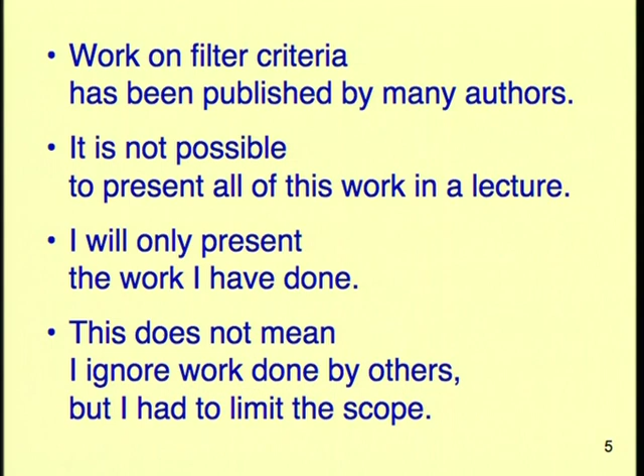Work on filter criteria has been published by many authors, and it is not possible to present all of this work in a lecture. In fact, I will only present work that I have done. This doesn't mean that I ignore work done by others, but I had to limit the scope. The work I've done on filter criteria is essentially theoretical. This does not mean I ignore experimental work. In fact, I do refer to experimental data, but by just doing rational analysis, it was possible to build a coherent system of filter criteria.

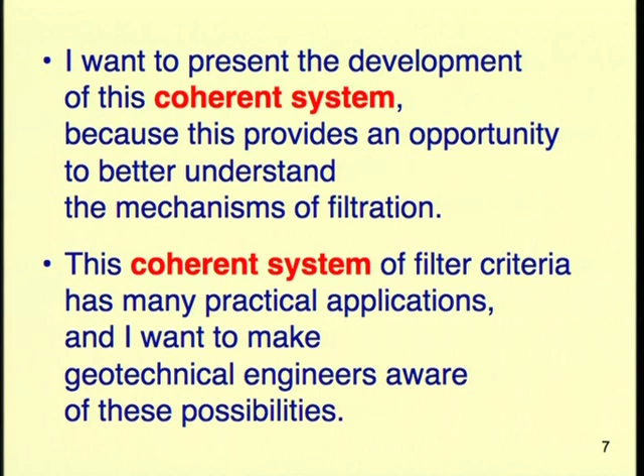And I want to present the development of this coherent system because it provides an opportunity to better understand the mechanisms of filtration. And this coherent system has many practical applications, and I want to make geotechnical engineers aware of these possibilities. I did this work to improve criteria for geotextile filters, but this work is applicable to granular filters. In fact, the first steps of the development of criteria for geotextile filters were inspired by granular filter criteria. As a result, this lecture often refers to Terzaghi's filter criteria.

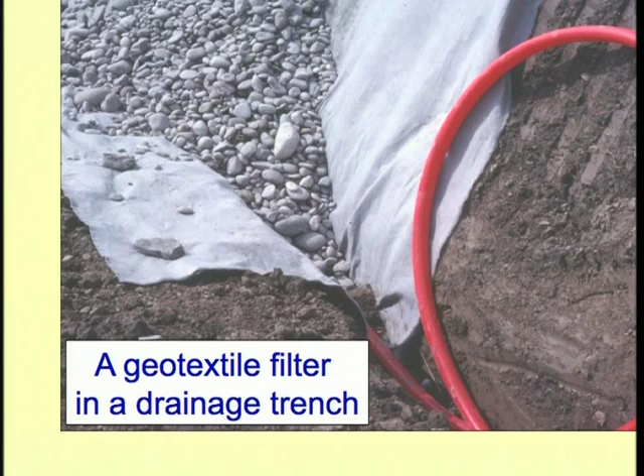Now, Terzaghi's criteria for granular filters are well known. The D15 of the filter should be greater than 4 or 5 times the D15 of the soil. That means the D15 of the filter must not be too small, and this is the permeability criteria. The D15 of the filter must be less than 4 or 5 times the D85 of the soil. That means the D15 of the filter must not be too large, and this is the retention criterion. The difference between the factors 4 or 5 is not significant, and I will use 5 in my discussions.

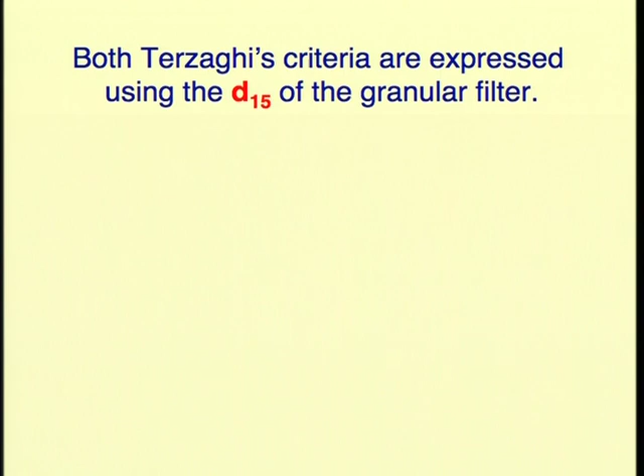Both Terzaghi's criteria are expressed using the D15 of the granular filter. This is possible because the D15 of a granular material is related to the size of its openings. And the relationship is, opening size is 1/5 of the D15 of the filter approximately. And this is based on theoretical and experimental work on arrangements of particles. In the 70s, several criteria for filter fabrics were used, some of them inspired by Terzaghi's criteria.

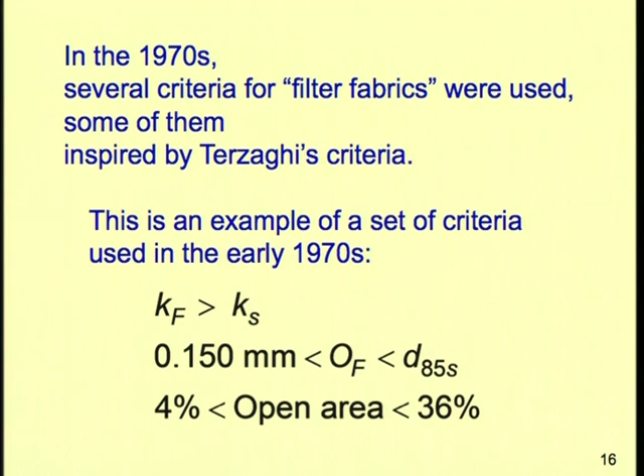Here is an example of criteria used in the 70s. In particular, the opening size of the filter had to be smaller than the D85 of the soil and greater than 0.15 millimeters. Early on, it was even explicitly mentioned that non-woven filter fabrics should not be used.

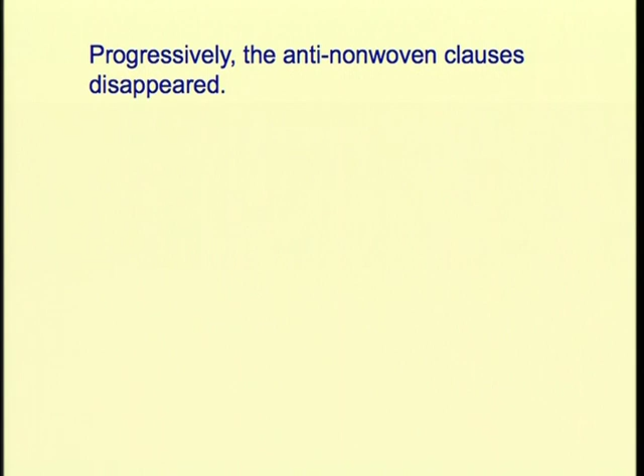In any case, many non-woven fabrics were eliminated by the requirement of opening size greater than 0.15 millimeters, and all were eliminated by the requirement that the open area should be less than 36%. Progressively, the anti-non-woven clauses disappeared. However, the remaining criteria for filter fabrics were not completely satisfactory, as we will discuss. And then in 1977, the terminology geotextile appeared, and it will be used in the rest of this lecture.

In this lecture, I will discuss problems related to the old criteria, present the development of proposed criteria, and discuss the application of the proposed criteria to both geotextile filter and granular filters. First, the development of a permeability criterion for geotextile filters with applications to granular filters.

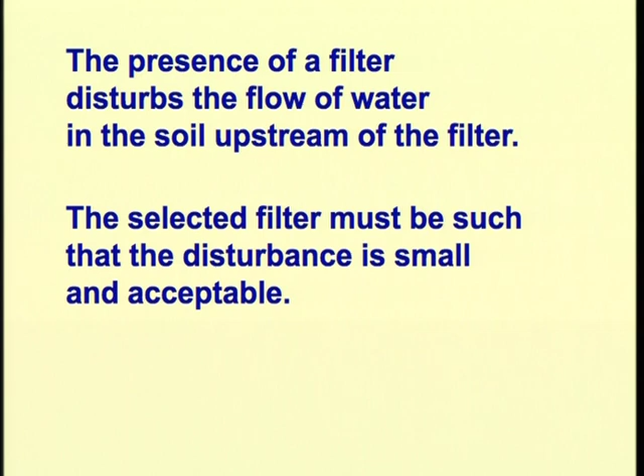The presence of a filter disturbs the flow of water in the soil upstream of the filter. So the selected filter must be such that the disturbance is small and acceptable. The disturbance can affect pore pressure and flow rate. Therefore, the permeability criterion should include two requirements, one for pore pressure and the other for flow rate. So first, the pore pressure requirement.

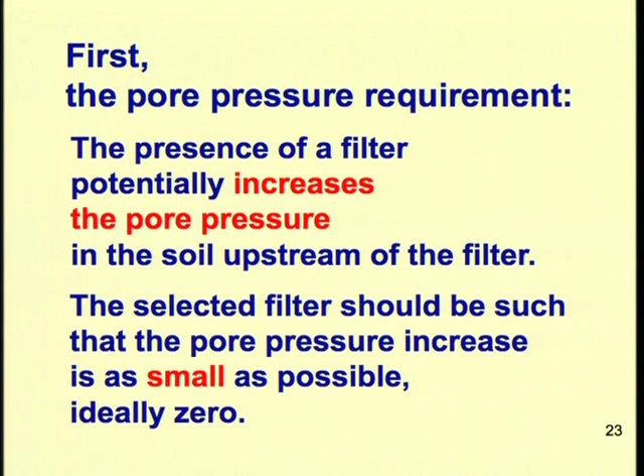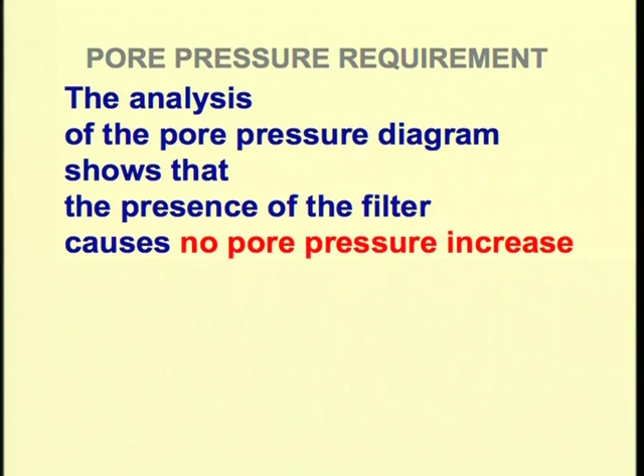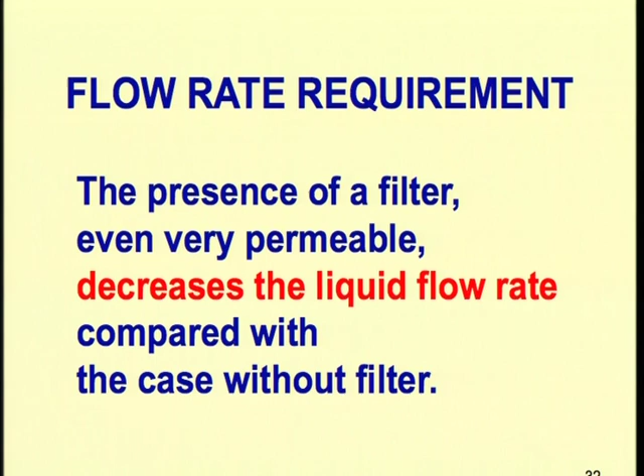The presence of a filter, even very permeable, decreases the flow rate compared to the case without filter. Calculations done with Darcy's equation show that the flow rate decrease is less than 10% of the flow rate without filter if the following requirements are met. Hydraulic conductivity of filter greater than hydraulic conductivity of the soil if the filter is thin, 1 to 10 millimeters, and hydraulic conductivity of the filter greater than 25 times hydraulic conductivity of the soil for a thickness of the order of 250 to 2500 millimeters.

Of course, the thickness applies to geotextile filters. Therefore, the first requirement reads hydraulic conductivity of the filter greater than hydraulic conductivity of the soil for geotextile filters. And the second requirement applies to granular filters, and therefore it reads hydraulic conductivity of the filter should be greater than 25 times the hydraulic conductivity of the soil in the case of granular filters. Let's discuss those two requirements.

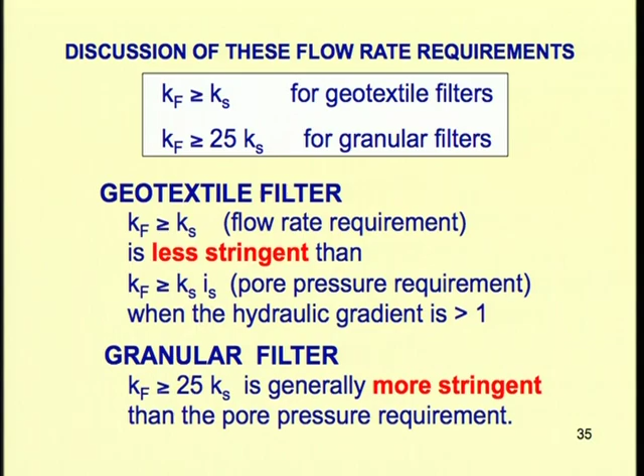In the case of geotextile filters, the flow rate requirement is less stringent than the pore pressure requirement when the hydraulic gradient is greater than 1, and the opposite, of course, when the hydraulic gradient is less than 1. With granular filters, 25 times the hydraulic conductivity of the soil is virtually always more stringent than the pore pressure requirement because the gradient is virtually always less than 25.

Now, it's important to note that this flow rate requirement for granular filters can be expressed in terms of particle size. Indeed, it is well known that the permeability of a granular material is proportional to the square of a small particle size, D10, D15, for example. This is the well-known Kozeny-Carman equation, of which Hazen's equation is a special case. Therefore, the flow rate requirement for a granular filter is equivalent to D15 of the filter greater than 5 times the D15 of the soil. Of course, this is the classical permeability criterion for granular filters.

So this discussion shows that the classical permeability criterion for granular filters is only the flow rate requirement and not the pore pressure requirement. But generally, it is more stringent, so it is not a problem.

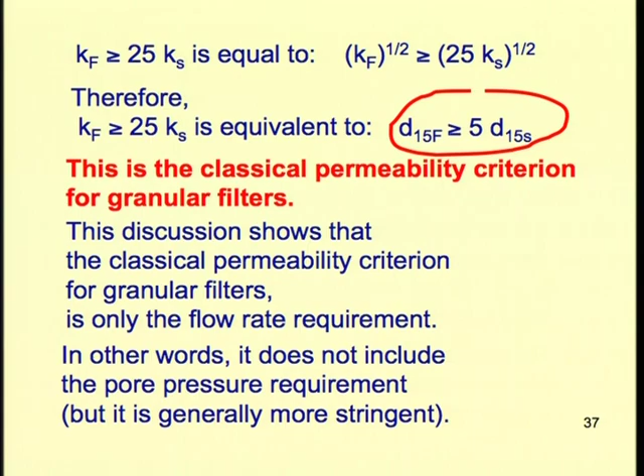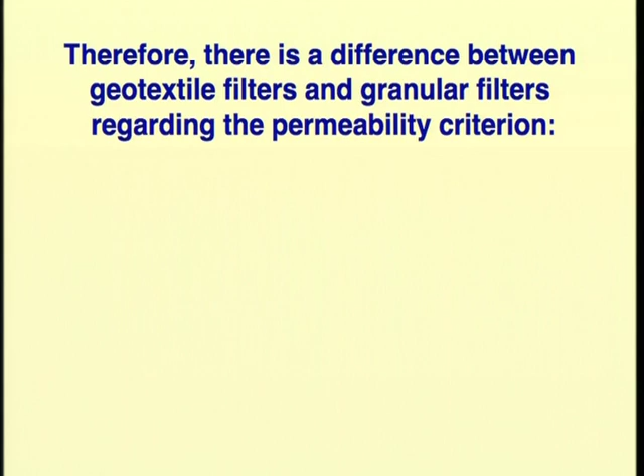So in conclusion, the permeability criterion for geotextile filters is either Ks multiplied by the gradient or Ks, depending on the gradient, whichever is greater. But for granular filters, it is generally 25 times the hydraulic conductivity of the soil, which is the traditional permeability criterion. So therefore, there is a difference between granular filters and geotextile filters regarding the permeability criterion.

In the case of geotextile filters, either the pore pressure requirement or the flow rate requirement governs, whereas in the case of granular filters, it is virtually always the flow rate requirement that governs. So clearly, to develop an appropriate permeability criterion for geotextile filters, it would have been incorrect to simply imitate Terzaghi's permeability criterion for granular filters, because we would have seen only one of the two requirements.

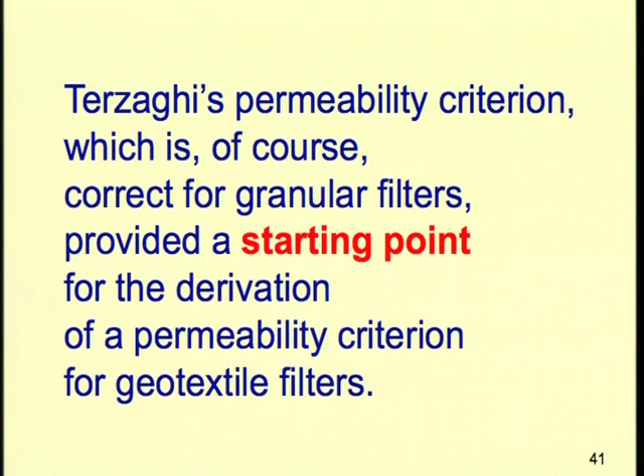So Terzaghi's permeability criterion, which is of course correct for granular filters, provided a starting point for the derivation of a permeability criterion for geotextile filters. However, to extend the work of Terzaghi on granular filters to geotextile filters, it was necessary to thoroughly understand the requirements related to water flow through a filter.

Let us discuss now the development of retention criterion for geotextile filters with applications to granular filters. The question is, how should we select the maximum allowable opening size of a geotextile filter to retain a soil? A simple answer would consist in adapting to geotextiles Terzaghi's retention criterion for granular filters, which is D15 of the filter less than 5 times D85 of the soil.

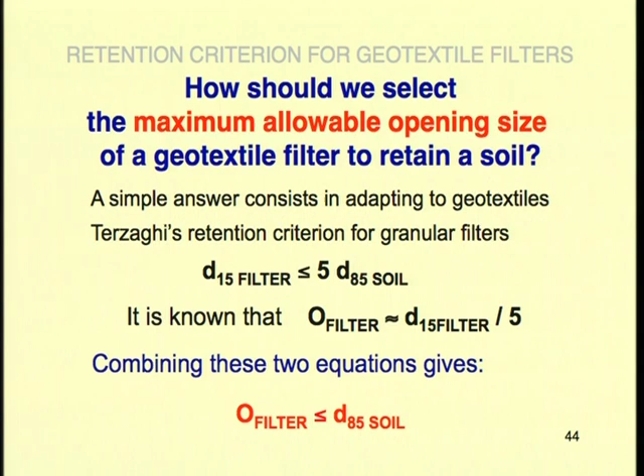We know that the opening size of a filter is about 1/5 of the D15 of that filter. Combining the two equations gives opening size of the filter less than D85 of the soil. This equation means that a filter should only retain the large soil particles. Retaining large soil particles works if the large particles retain smaller particles. In other words, if the soil is internally stable. Therefore, an ideal retention criterion should take into account not only the opening size of the filter, but also the internal stability of the soil.

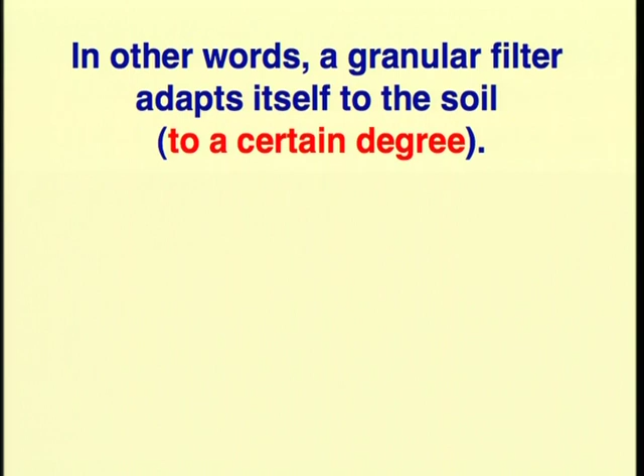However, to a certain degree, granular filters may work even if the soil is not internally stable because they are thick. And the mechanism is the following. Particles that are not retained may accumulate in the filter, thereby decreasing the filter opening size until the filter works. In other words, a granular filter adapts itself to the soil to a certain degree. As a result, a granular filter can be designed to a certain degree using a retention criterion, such as Terzaghi's retention criterion, that does not take into account the internal stability of the soil.

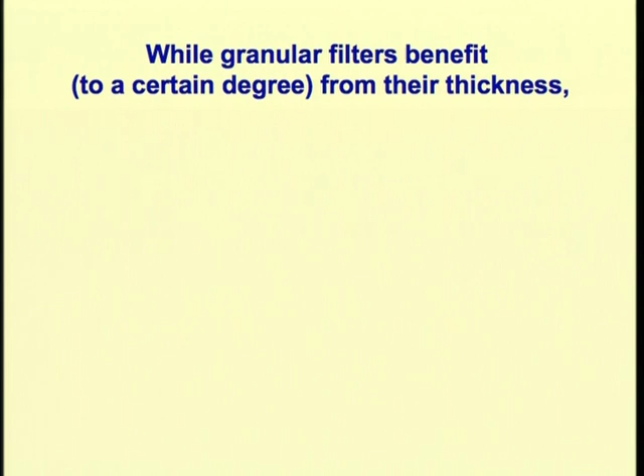Essentially, granular filters, because they are thick, can be designed using a simple retention criterion, such as Terzaghi's retention criterion. However, this is true only to a certain degree, which limits the applicability of Terzaghi's retention criterion to soils having a maximum particle size of 4.75 millimeter, hence the practice of the truncation of the particle size distribution curve, which we will discuss later. Now, while granular filters benefit to a certain degree from their thickness, geotextile filters are thin, which has created an incentive for developing more accurate retention criterion. A criterion that takes into account the internal stability of the soil.

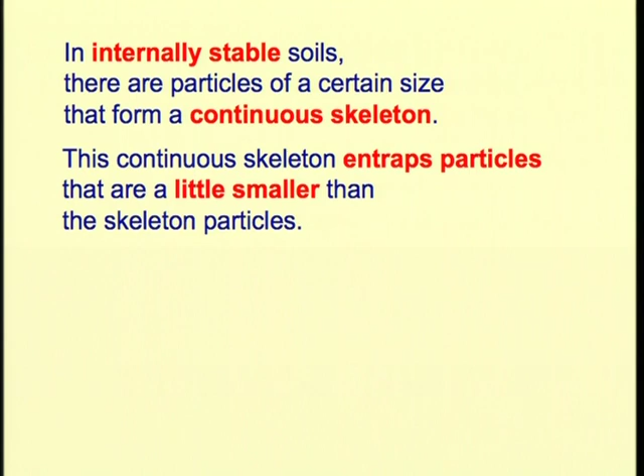In internally stable soils, there are particles of a certain size that form a continuous skeleton. This continuous skeleton entraps particles that are a little smaller than the skeleton particles. In turn, these particles entrap particles that are a little smaller, and so on. So this is an internally stable soil. So therefore, if a filter has openings such that the skeleton is retained, then all particles smaller than the skeleton are retained in the case of an internally stable soil. And of course, particles larger than the skeleton particles will be retained, because if a filter retains certain particles, of course, coarser particles will be retained.

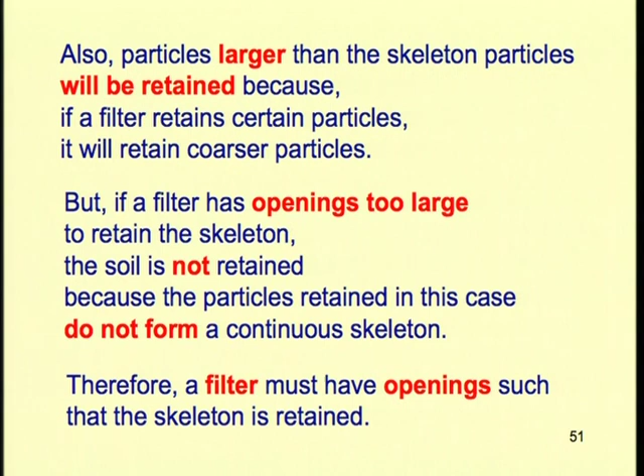But if a filter has openings too large to retain the skeleton, the soil is not retained because the particles that are retained in this case do not form a continuous skeleton. So therefore, a filter must have openings such that the skeleton is retained. So that leads to two questions. What is the size of the skeleton particles? And what filter opening size is required to retain a given skeleton? So let's address the first question.

As mentioned earlier, the skeleton is an essential consideration for the retention of an internally stable soil. Internal stability depends on particle size distribution, which is characterized by the coefficient of uniformity. So geometric considerations show that in a soil with a coefficient of uniformity of approximately 3, particles are tightly interlocked.

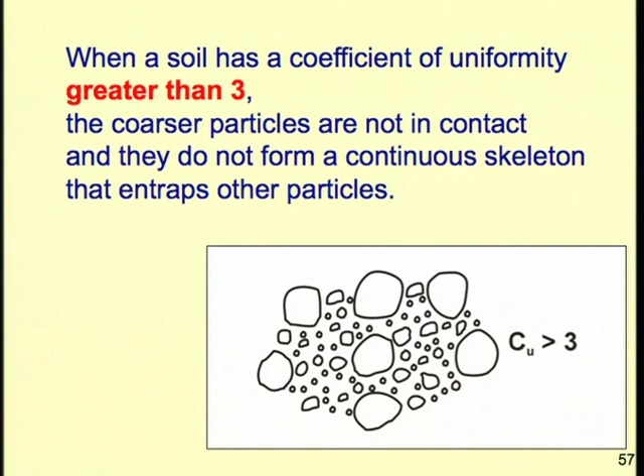In other words, such a soil has maximum internal stability. This is illustrated in the following slides. When a soil has a coefficient of uniformity equal to or less than 3, the coarser particles form a continuous skeleton that entraps all other particles. But if a soil has a coefficient of uniformity greater than 3, the coarser particles are not in contact, and they do not form a continuous skeleton that entraps other particles.

In other words, when a soil has a coefficient of uniformity greater than 3, the coarser particles float in the matrix formed by the other particles, and as a result, they do not contribute to internal stability. So, in the case of a soil having a coefficient of uniformity greater than 3, to develop a retention criterion that takes into account internal stability, we will only consider the fraction of the soil that has a coefficient of uniformity equal to 3. In other words, we ignore the coarse fraction in the development of the retention criterion.

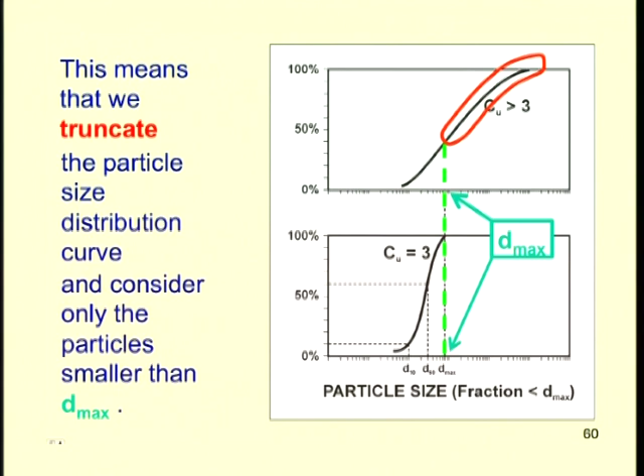This means that we truncate the particle size distribution curve and consider only the particles smaller than Dmax, shown here, such that the remainder of the curve has a coefficient of uniformity of 3. Now, the user of the proposed retention criterion does not have to do this truncation. The truncation is done automatically. It is included in the equations that express the retention criterion. So only this fraction of the curve with a coefficient of uniformity of 3 is used in the proposed retention criterion. So we answered the first of the two questions, the size of the skeleton particles.

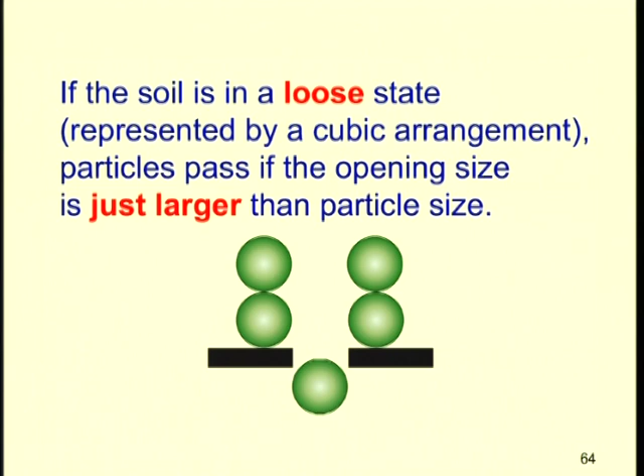Now, what filter opening size do we need to retain a given skeleton? If a soil is in a loose state, represented by a cubic arrangement, particles pass if the opening size is just larger than the particle size. But if the soil is in a dense state, represented by a hexagonal arrangement, particles do not pass if the opening size is just larger than the particle size, because there is the formation of a stable bridge. So if the soil is in a dense state, particles pass only if the opening size is twice as large as particle size.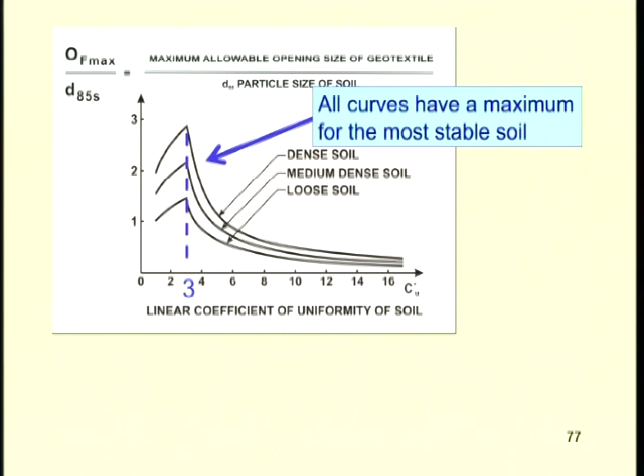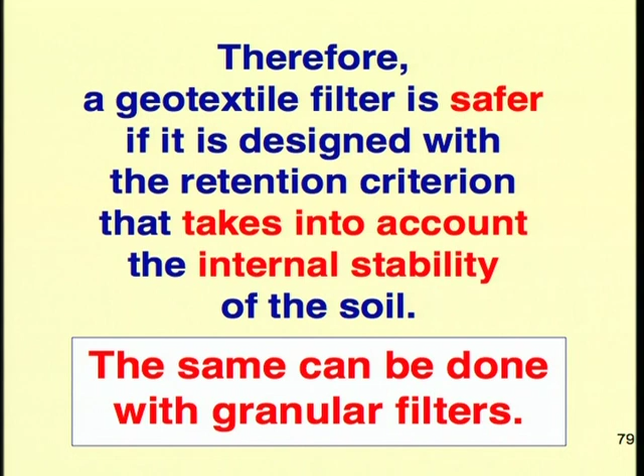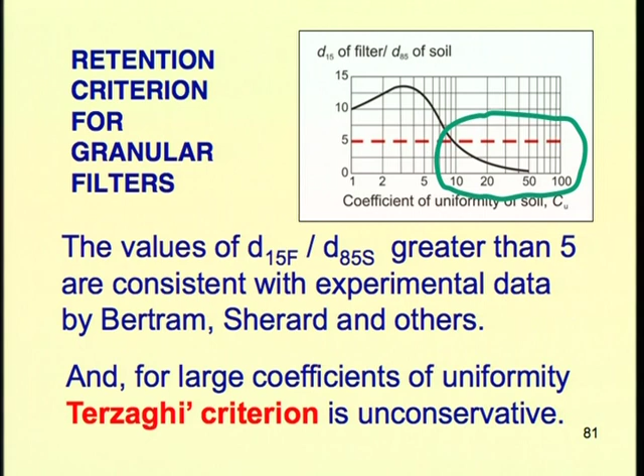But we can do the same for granular filters. The retention criterion developed, as we have seen for geotextile filters, can be extended to granular filter. And here, the vertical axis, instead of being opening size, is D15 divided by D85 of the soil, just to be consistent with the traditional practice for granular filters. And we see here values greater than 5 for the ratio D15 of the filter divided by D85 of the soil, but this is consistent with experiments by Bertram, Sherard, and others. And again, for large coefficient of uniformity, we can see that Terzaghi's criterion is not conservative.

An important consideration is that this retention criterion is applicable regardless of maximum particle size. In other words, it is not limited to particles smaller than 4.75 millimeter. Therefore, the need for the tedious operation of truncating particle size distribution curves at 4.75 millimeters is eliminated.

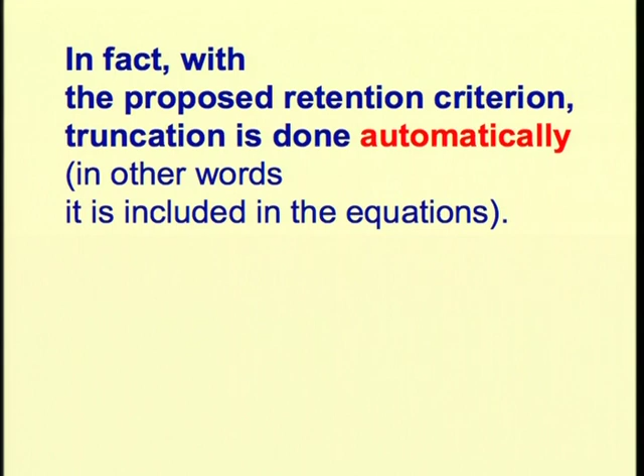In fact, with the proposed retention criterion, there is truncation, but it is done automatically. In other words, it is included in the equations, but more importantly, the automatic truncation takes place at the appropriate location, which is generally not 4.75 millimeters. So therefore, by extending to granular filters the retention criterion developed for geotextile filters, we have obtained a tool for designing granular filters that is simpler and safer than the traditional criterion for soils having a large coefficient

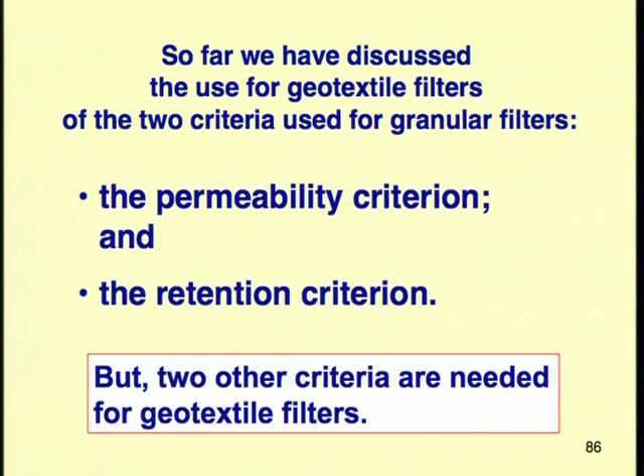of uniformity. So far, we have discussed the use for geotextile filters of the two criteria used for granular filters, the permeability criterion and the retention criterion. But two other criteria are needed for geotextile filters. Indeed, since there is an almost unlimited possibility of making new materials in geosynthetics manufacturing, it is possible to imagine extreme geosynthetic materials that would be unlikely to perform properly as filters, such as geosynthetics with very few openings or some extremely thin geosynthetics. So we need criteria to prevent the use of such materials as filters.

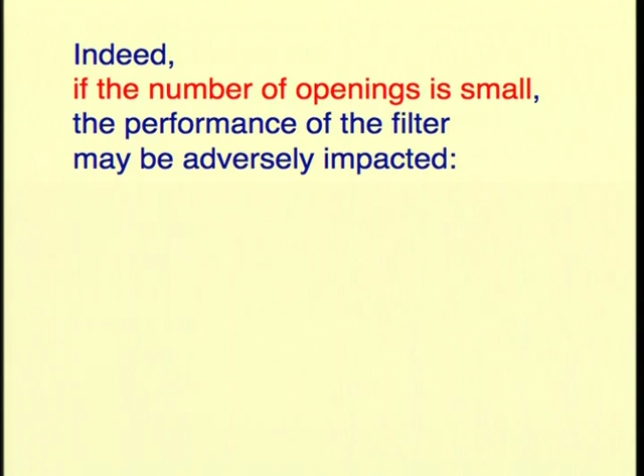So we need, therefore, two additional criteria. One, to ensure that the number of openings is sufficient, and a criterion to ensure that filter thickness is sufficient. First, let's discuss the criterion for the number of openings. In addition to having adequate opening size, a filter should have as many openings as possible per unit area. Indeed, if the number of openings is small, the performance of the filter may be adversely impacted. Liquid flow is concentrated in a small number of channels, which increases the risk of erosion, increases particle transport, thereby increasing the risk of clogging.

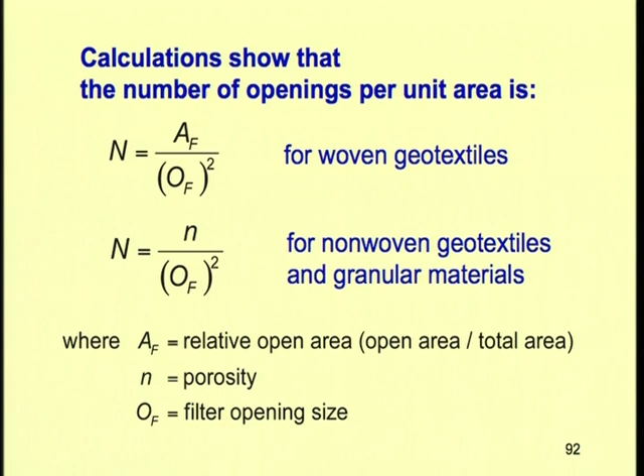And if the number of openings is small, clogging only a few of the openings may significantly reduce flow capacity. So it should be noted that geotextiles are so permeable that even if a geotextile has a small number of openings per unit area, it may still meet the permeability criterion. So clearly, the permeability criterion is not sufficient to eliminate geotextile filters that do not have enough openings. Therefore, a criterion specific to the number of openings per unit area is needed. Calculations show that the number of openings per unit area is given by the first equation for woven geotextiles, where AF is the relative open area of the woven geotextile, and the second equation for non-woven geotextiles, where n is the porosity of the non-woven material.

Now, the relative open area of a woven geotextile is in fact the two-dimensional equivalent of porosity. This is obviously true geometrically, but it's confirmed by the fact that open area in the equation for woven geotextiles plays the same role as porosity in the other equation. So therefore, both relative open area for a woven geotextile and porosity for a non-woven geotextile, or even a granular material, can generically be called the porosity of a filter material. So essentially, the two equations become one, and they mean that the number of filter openings is proportional to the porosity of the filter regardless of the type of filter. So in other words, regarding the required number of openings per unit area, all types of filters should be treated in the same way, and the governing parameter is the porosity of the filter material.

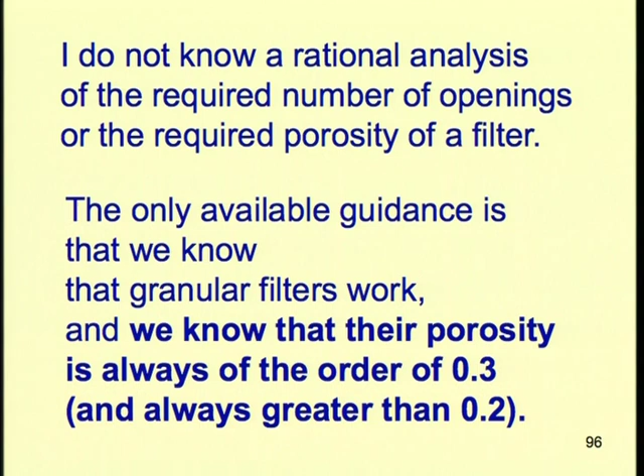Now, I do not know a rational analysis of the required number of openings or the required porosity of a filter. The only available guidance I know is that we know that granular filters work, and we know that their porosity is of the order of 0.3, almost always greater than 0.2. Therefore, it is reasonable to adopt the following porosity criterion for all filters. Porosity should be greater than 0.2, that is 20%. Now, this porosity criterion has never been formulated for granular filters because they all have approximately the same porosity.

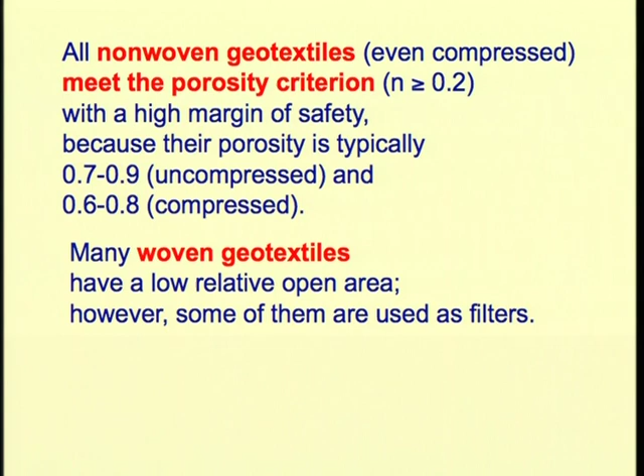But it is essential for geotextile filters because there is a wide range of porosity, from 1% to more than 90% for non-woven geotextiles. All non-woven geotextiles, even compressed, meet easily the porosity criterion. But many woven geotextiles have a low relative open area, which is the equivalent of porosity. However, some of them are still used as filters. But based on the analysis, woven geotextiles with a relative open area less than 20% should not be used as filters. Let's discuss the second of these new criteria needed for geotextile filters, the criterion related to thickness.

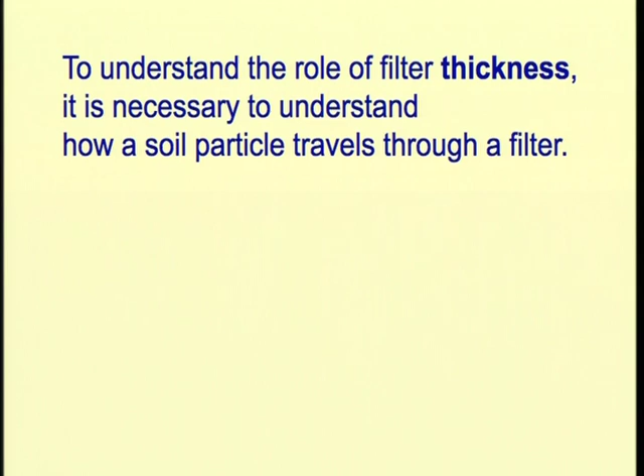And in this discussion, I will not consider woven geotextile filters because thickness is a special consideration in this case. So I will only discuss non-woven geotextile filters and granular filters. To understand the role of filter thickness, it is necessary to understand how a soil particle travels through a filter. A soil particle that travels through a filter, any filter, granular or non-woven geotextile, must go through narrow passages called constrictions.

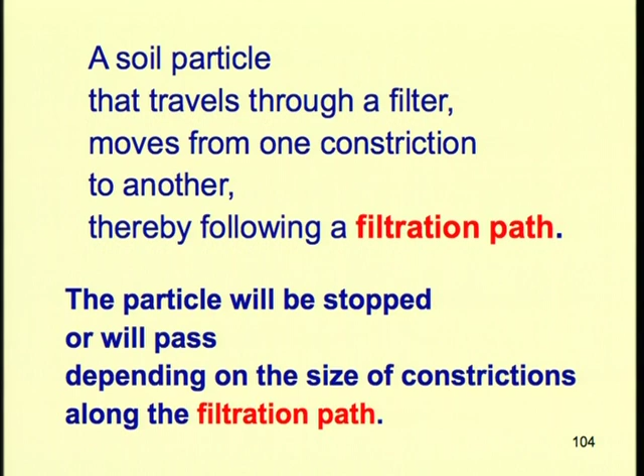In the case of a geotextile filter, a constriction is a passage between fibers. And the size of a constriction is the diameter of the largest spherical particle that passes through the constriction. Now, a soil particle that travels through a filter moves from one constriction to another, thereby following a filtration path. The particle will be stopped or will pass depending on the size of constrictions in that particular filtration path.

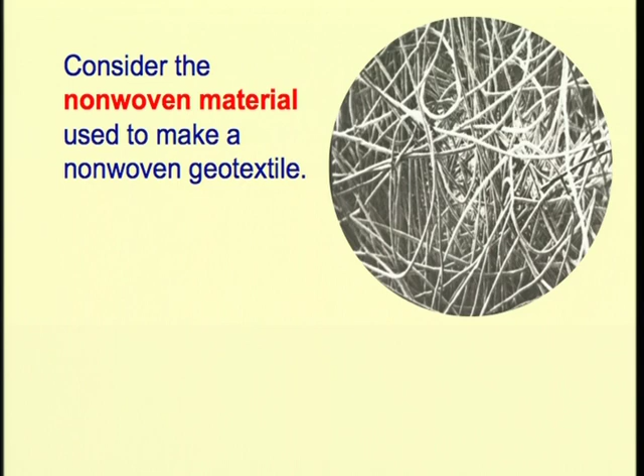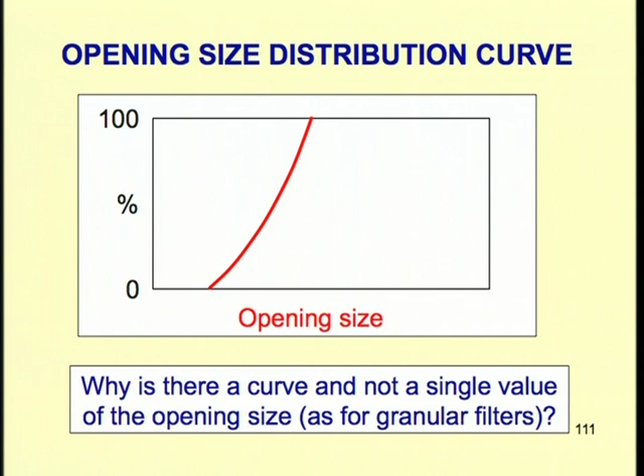A geotextile with a given thickness is characterized by another curve, which is the opening size distribution curve, shown here. So why do we have a curve and not a single value of the opening size as we have in granular filters? Let's discuss that.

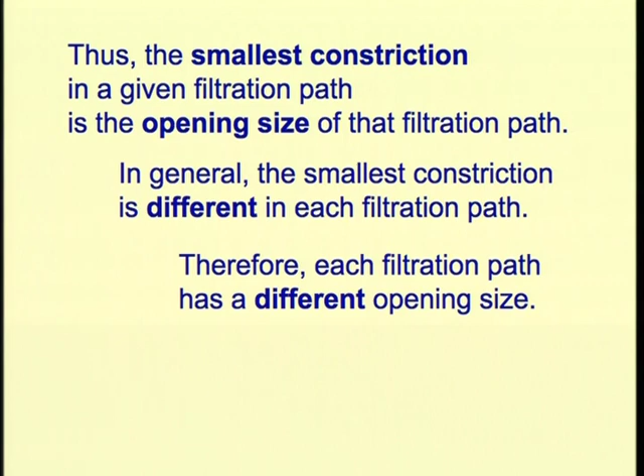Each filtration path contains a number of constrictions. A soil particle can go through the filter if it is smaller than the smallest constriction in the path. So therefore, each filtration path is characterized by the smallest constriction in that path. Thus, the smallest constriction in a given path is the opening size of that filtration path. In general, the smallest constriction is different in different filtration paths. So therefore, each filtration path has a different opening size. So this is why we have an opening size distribution curve, shown here again.

And naturally, the maximum opening size for all filtration paths is the opening size of the filter, which is, of course, at the top of the opening size distribution curve. So now we have two curves. So what is the relationship between these two curves? The opening size distribution curve, which characterizes a filter with a given thickness, and the constriction size distribution curve, which characterizes the material used to make the filter. So we need to make some geometric considerations to establish this relationship.

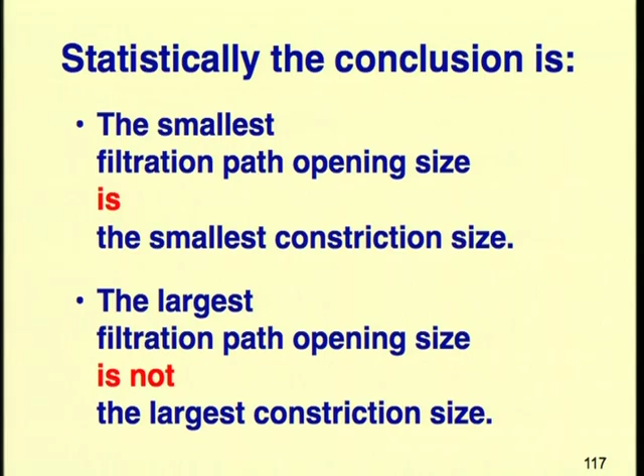In a filter, there is a very large number of filtration paths, millions per square meter. But in a non-woven geotextile filter, due to the limited thickness, there are not many constrictions in each filtration path, typically 10 to 100. So statistically, it's very different, 1 million or 10 to 100. So statistically, the conclusion is the smallest filtration path opening size is the smallest constriction size, but the largest filtration path opening size is not the largest constriction size. Accordingly, the two curves have the same origin, but not the same top.

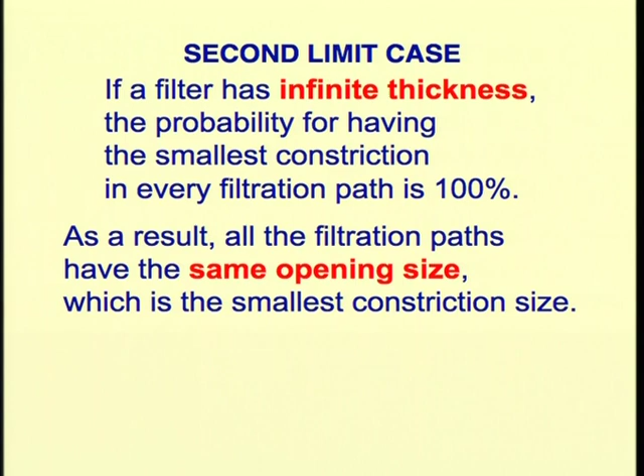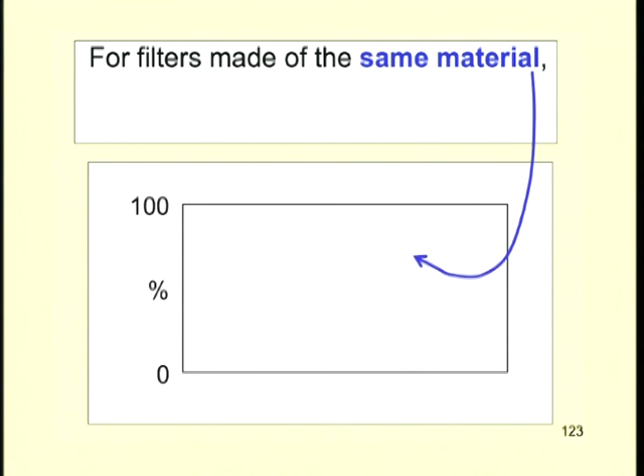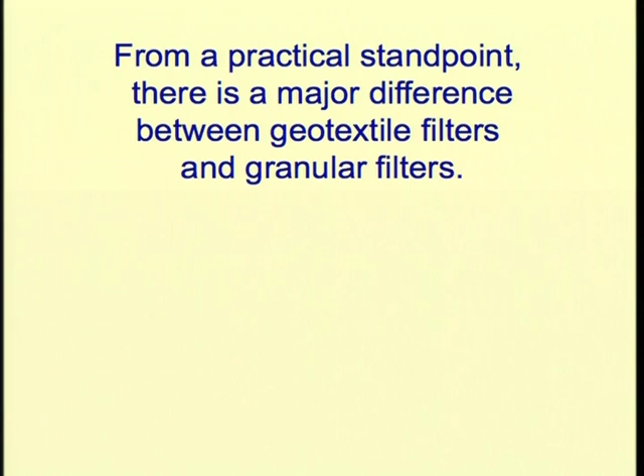And we just saw that, in fact, it decreases for increasing values of the thickness of the filter. This is true for all types of filters. But from a practical standpoint, there is a major difference between geotextile filters and granular filters. Granular filters have a quasi-infinite thickness. So therefore, they have a unique opening size, as we just demonstrated.

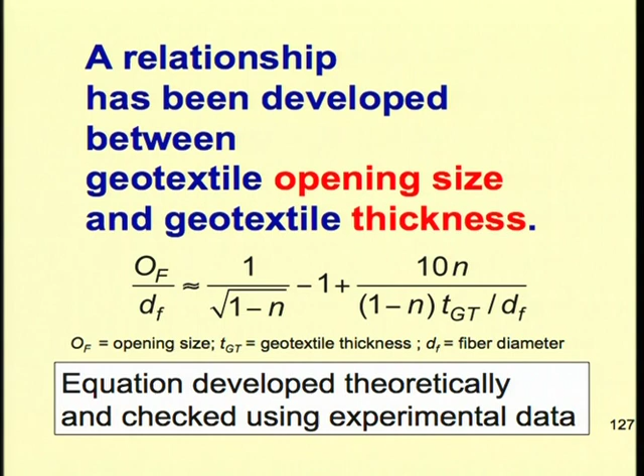Now, so far in this lecture, the impact of geotextile thickness on opening size has been discussed qualitatively. But I have done a mathematical analysis and obtained a relationship between geotextile opening size and geotextile thickness. This is the equation, and the parameters are the fiber diameter and the porosity of the geotextile. This relationship is represented by a family of curves, for non-woven geotextiles, as I said before.

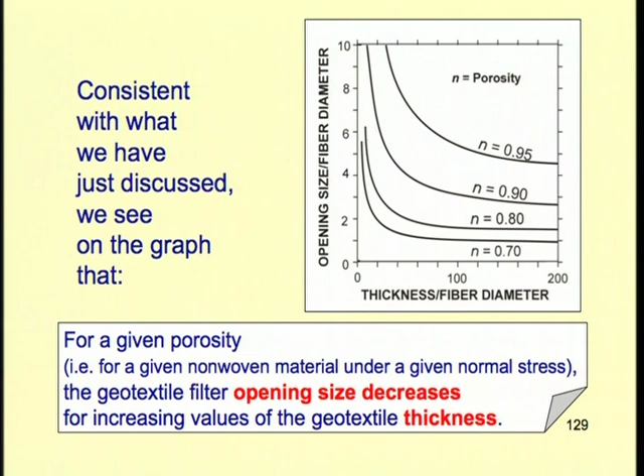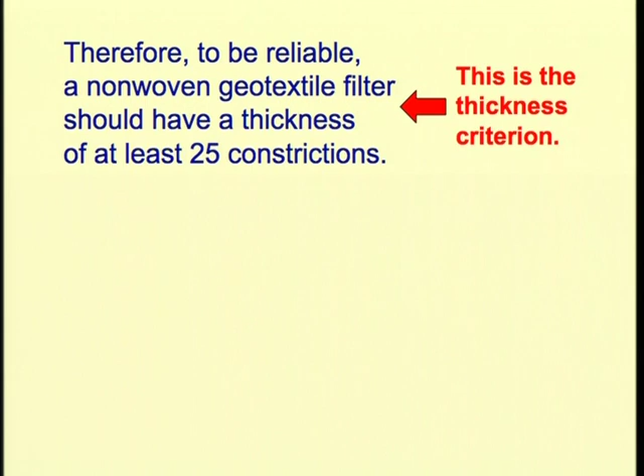Now, it's convenient to express thickness in terms of number of constrictions, so the criterion is independent of porosity, fiber diameter, etc. This work, by the way, is the basis for an ASTM standard on filtration. In summary, four filter criteria have been established for geotextile filters: permeability, retention, porosity, and thickness.

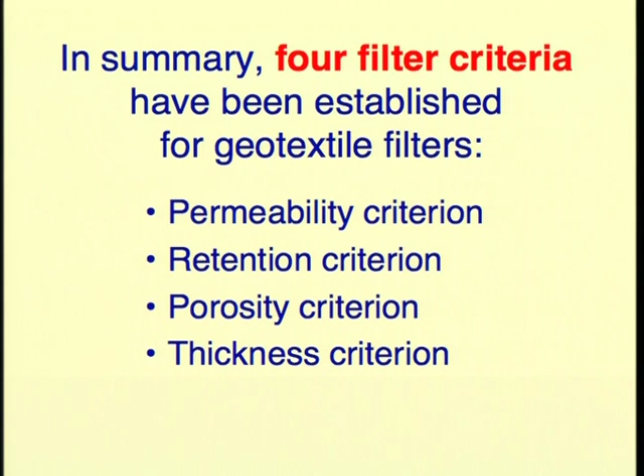But there is a last question. Is this complete? Well, filtration is governed by filter openings. The characteristics of filter openings are the size, the shape, the density, which is the number per unit area, and the distribution. The four criteria address three of those characteristics, as we have seen: the size, the density, and the distribution. But we did not address the shape in those four criteria.

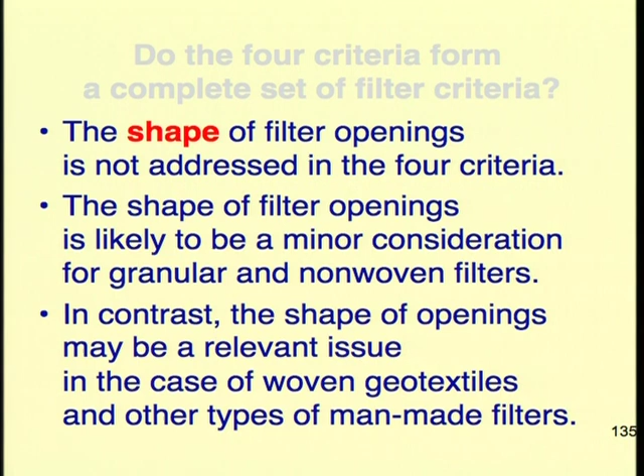The shape of filter openings is likely to be a minor consideration for granular and non-woven filters due to the random structure. But in contrast, the shape of openings may be a relevant issue in the case of woven geotextiles or other types of man-made filters. So clearly more work is needed on the impact of shape of filter openings on the performance of filters.

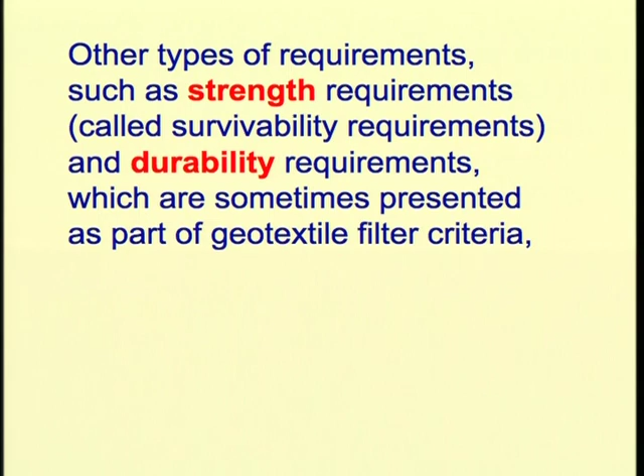But in the meantime, we can consider that the set of four criteria is complete, at least for granular and non-woven filters. Furthermore, this set of four criteria is a coherent set because it addresses only parameters that are relevant to the filtration function. Other types of requirements for geotextile filters, such as strength requirements and durability requirements, are sometimes presented as part of geotextile filter criteria. These are not filter criteria because they are not intrinsic to the filtration function. They can be used for geotextiles performing any other function.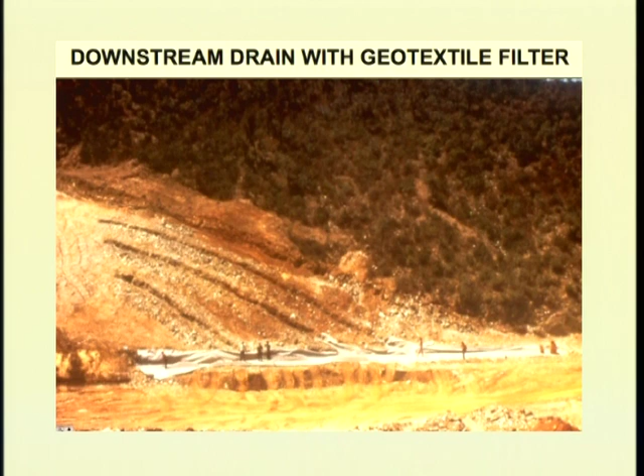This is a photo taken during construction of the downstream portion. You see here where approximately will be the embankment of the dam. We see here a downstream drain with geotextile filter and gravel in the trench, and being constructed finger drains on the side connected to the downstream drain, also equipped with geotextile filter. It is a 17-meter high homogeneous dam constructed with silty sand.

I was the design engineer for the dam, and I could not get adequate sand filter at the last minute. I had to make a quick decision. I elected to use a non-woven geotextile, never used before as a filter. That was in 1970. The dam has been constructed and has been in service ever since 1970.

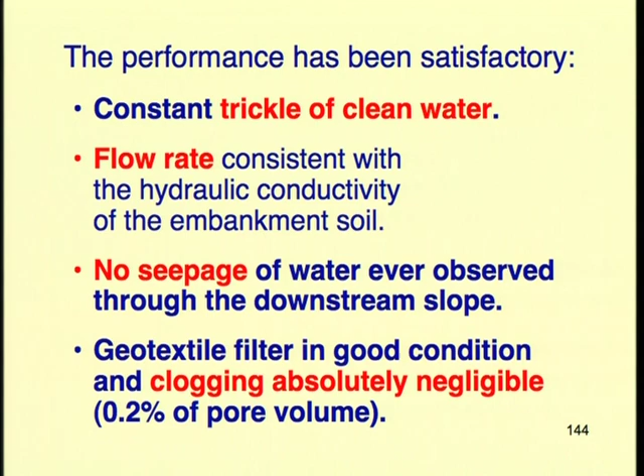The performance has been satisfactory: a constant trickle of clean water, flow rate measured at the outlet consistent with the hydraulic conductivity of the embankment soil, no seepage of water ever observed through the downstream slope, and the geotextile filter in good condition, in particular with negligible clogging, 0.2% of the pore volume, as demonstrated by tests on samples of geotextiles removed from the actual filter 6 years and 22 years after construction.

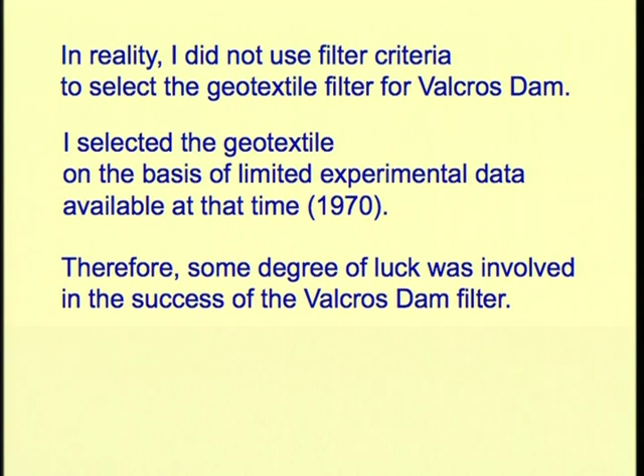So the outstanding performance of the geotextile filter can be explained today. The first comment I will make is that fortunately the filter was not designed using classical filter criteria. In reality, I have to confess that I did not use filter criteria to select the geotextile filter. I selected the geotextile on the basis of limited experimental data available at that time. Therefore, some degree of luck was involved in the success of this filter, and this is why I'm here today.

Ten years later, in the 80s, I felt compelled to repay for that luck and started working on filter criteria. So today, we can finally use the filter criteria for this dam. We have no time, so I just say that it is easy to check that the permeability, porosity, and thickness criteria were met, and we will only discuss the most important, the retention criteria.

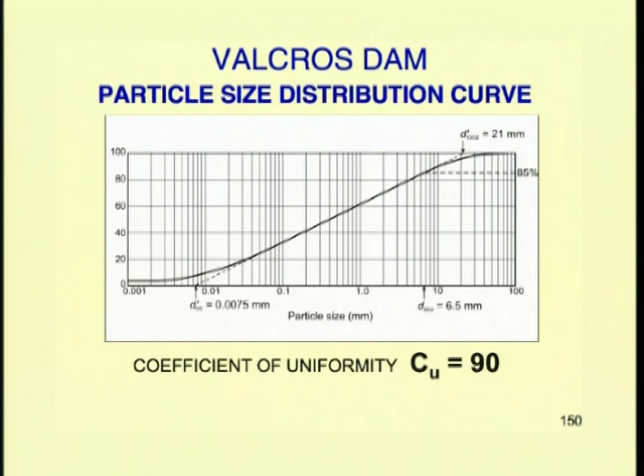This is the particle size distribution curve of the soil used in the dam. Coefficient of uniformity, 90. Linear coefficient of uniformity, 53. Using Terzaghi's retention criterion on the full curve, we obtain 6.4 millimeter. This is very large. We would not use that to retain a silty sand. Well, of course, the problem is caused by the large coefficient of uniformity. So we do what all geotechnical engineers do, truncate the curve.

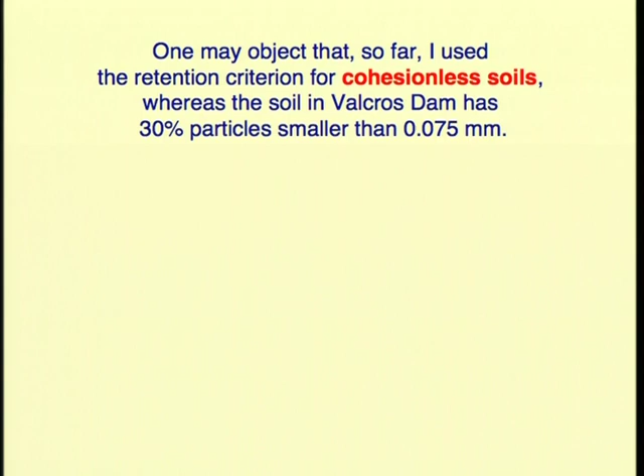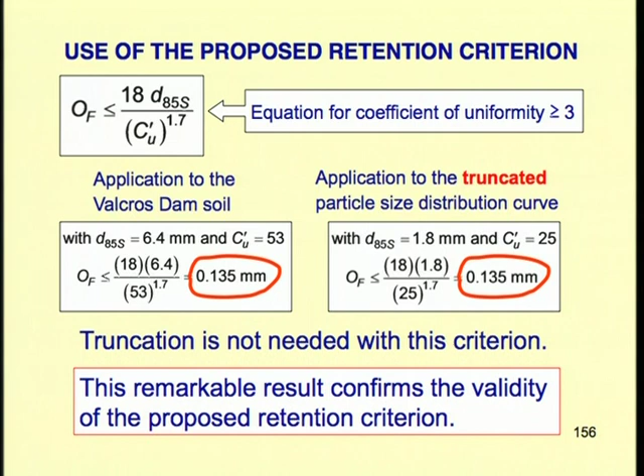So let's try to use the proposed retention criterion. This is the relevant equation for this case, taken from the table I showed before. Used it for the particle size distribution and obtained 0.135 millimeter. Let's try to use it for the truncated particle size distribution curve, and we find the same result. Well, we should not be surprised because I said that truncation is automatically included in the retention criteria. So this is why we obtain the same result. This remarkable result confirms the validity of the proposed criterion.

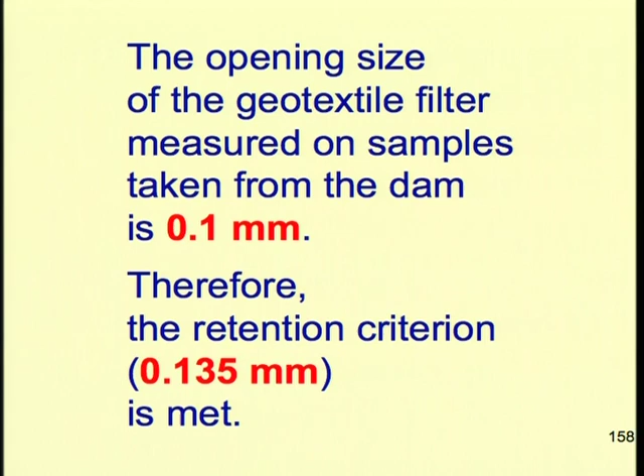In conclusion, the required value for the opening size of the filter was 0.135 millimeter. This seems more reasonable than the larger values that we obtain with other criteria. The measured opening size on samples taken from the dam was 0.1 millimeter. Interestingly enough, with one of the equations I presented before, we can also calculate opening size from fiber diameter, porosity, etc., and we obtain 0.099 millimeter. So, therefore, the retention criterion is met here. So in conclusion, the geotextile filter performed well since construction. The 4 criteria are met, which is consistent with the good performance.

In summary, we have reviewed the 2 classical filter criteria, the permeability criterion and the retention criterion, for both granular and geotextile filters. We have added 2 criteria for geotextile filter, the porosity criterion and the thickness criterion. The conclusion for geotextile filters is that the 4 proposed criteria form a coherent set of criteria that allow safe design of geotextile filters. And the conclusion for granular filter is that the retention criterion for granular filters can be improved based on developments made for geotextile filters.

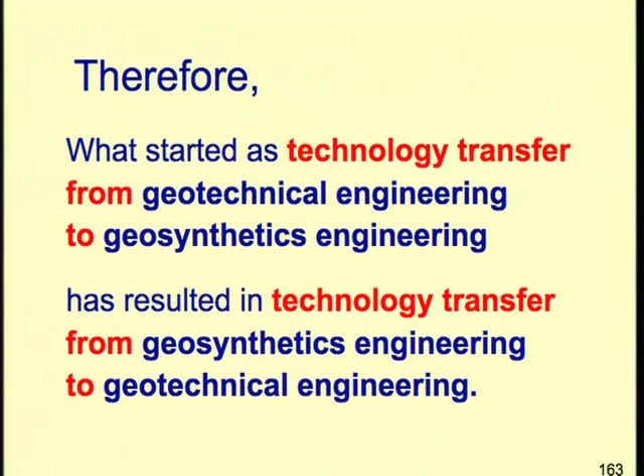Therefore, what started as technology transfer from geotechnical engineering to geosynthetics engineering has resulted in technology transfer from geosynthetics engineering to geotechnical engineering. I am sure that Terzaghi would have agreed that his famous filter criteria were not frozen forever, but rather could lead to new developments. I am sure Terzaghi would have agreed that with new filter material, the geotextile, it was not sufficient to adapt his criteria, but it was necessary to review the fundamentals of filtration and develop new criteria.

So just imitating the great masters is not the best approach to solving modern problems. We do not have to do today what Terzaghi would have done 50 years ago. We need to do today what Terzaghi would do today. Thank you.

Would you like to take questions? No, this is better.

Thank you, Dr. Giroud, for your excellent lecture. We're all very thankful that we don't have to rely on luck because we can follow the design criteria that you provide for us. Thank you.